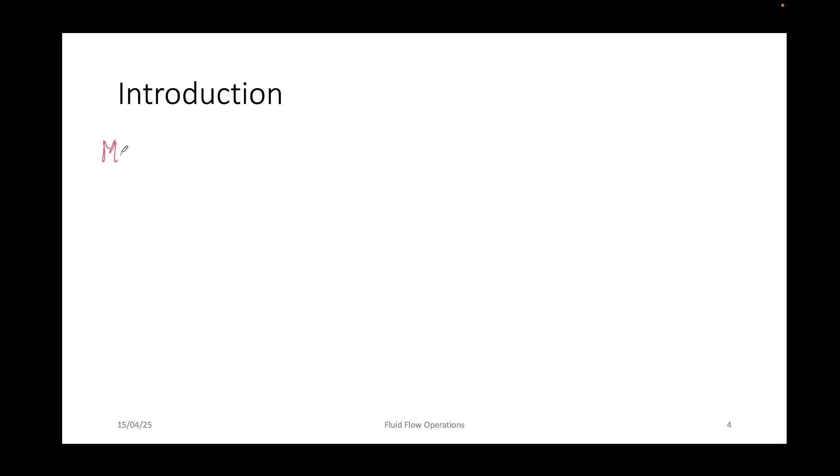What do you understand by the term multi-phase flow? Anyone? You can type it in the chat box or you can unmute yourself and answer me.

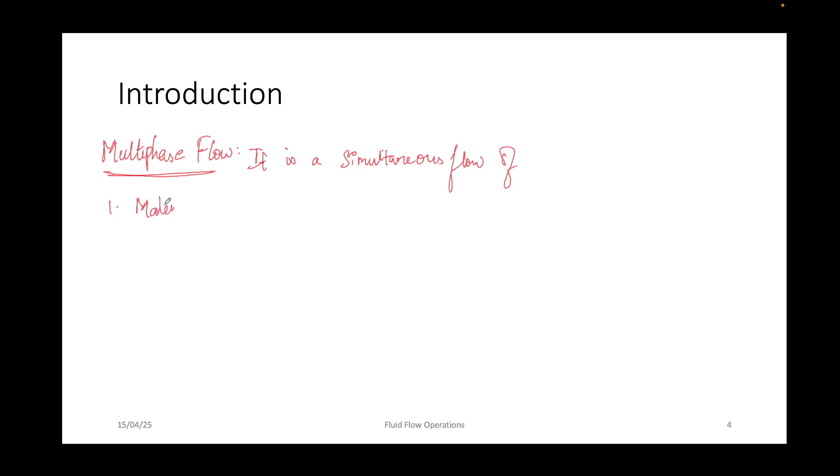So it's nothing but having two different phases in the same flow, right? Be it liquid phase, gas phase, solid phase, something like that. If you go to the proper definition, multi-phase flow is a simultaneous flow of materials with different states or phases. Let me just write it down. It is a simultaneous flow of materials with

different states or phases. So it could be either a gas phase, liquid phase, or a solid phase. Basically, they should be in different phases. It could also be a simultaneous flow of materials with different chemical properties, but in the same state or phase.

Materials with different chemical properties, but in the same state or phase. So multiphase can be a combination of a liquid phase and a gas phase.

So we have three phases, right? Solid, liquid, and gas. It could be solid-liquid, liquid-gas, or solid-gas, right? But a multiphase flow can be formed with the same phase as well. Let's take a liquid-liquid phase.

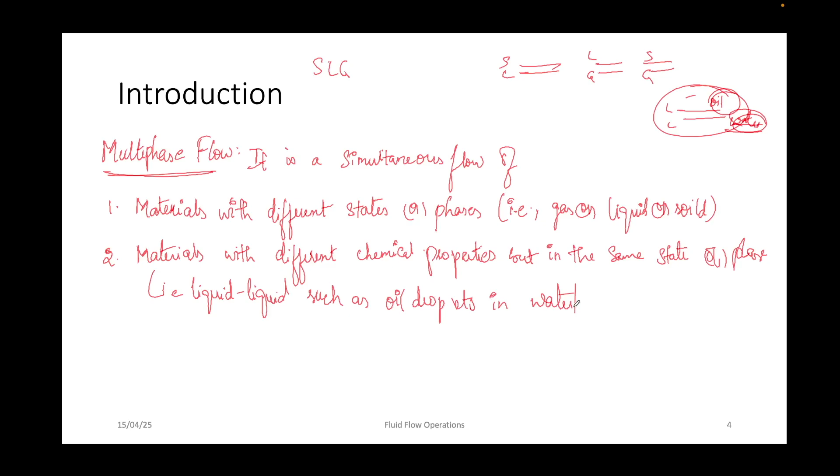Liquid-liquid, such as oil droplets in water. This is the best example of multi-phase flow. When you're talking about multi-phase flow, there are a few terms you need to understand. The first one is continuous phase and discrete phase.

Continuous and discrete phases. Okay, so what is a continuous phase and what is a discrete phase? So if that particular liquid, gas, or solid is flowing continuously, it is nothing but a continuous phase.

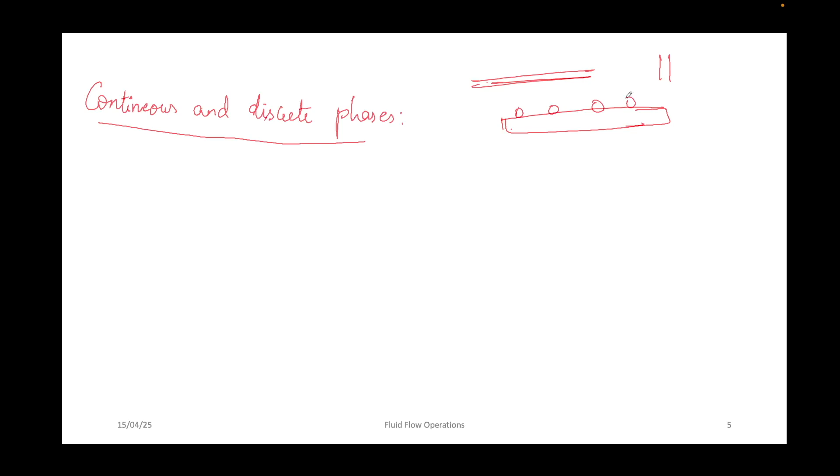And if there are any partitions, like sections, let's say this is a liquid phase and oil droplets are dispersed in a liquid phase, or liquid flow, then this could be a discrete phase, right? So there'll be sections between two different points. So one phase will be a continuous phase, while the other phase will be dispersed within the continuous phase. So this could be one arrangement of multi-phase flow.

One of the phases is continuous, while the others are dispersed within the continuous phase. Okay.

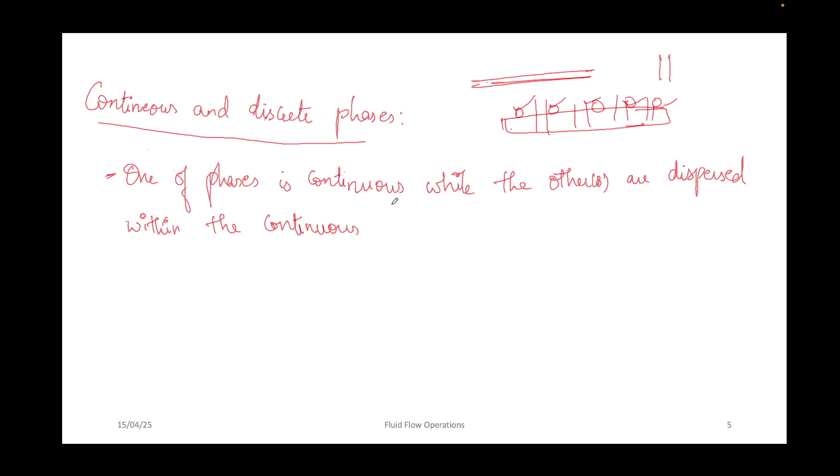So we could be having n number of phases, right? Let's say we can have a three-phase system. Multi-phase means you are having more than one phase. So you can have two phases flowing simultaneously, or you could also have three phases flowing simultaneously. So that is why I wrote others instead of other.

So what could be an example? Gas bubbles in liquid could be an example. Liquid droplets in a continuous gas phase could be an example, or liquid droplets in another liquid, like oil dispersed in water, or solid in liquid or gas phase. That could be an example.

Gas bubbles in liquid phase is an example of a dispersed phase in a continuous phase. So here gas bubbles will be the dispersed phase and liquid will be the continuous phase. And then we have liquid drops in continuous gas phase. And then we have liquid drops in another liquid. And then we have solid in liquid or gas phase.

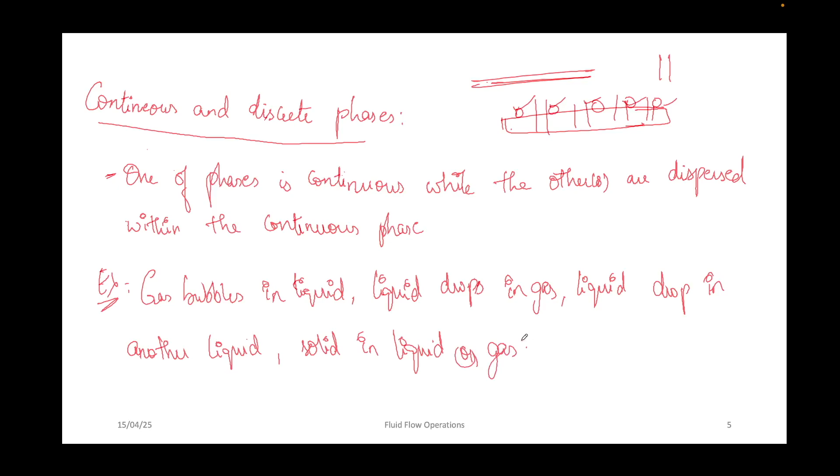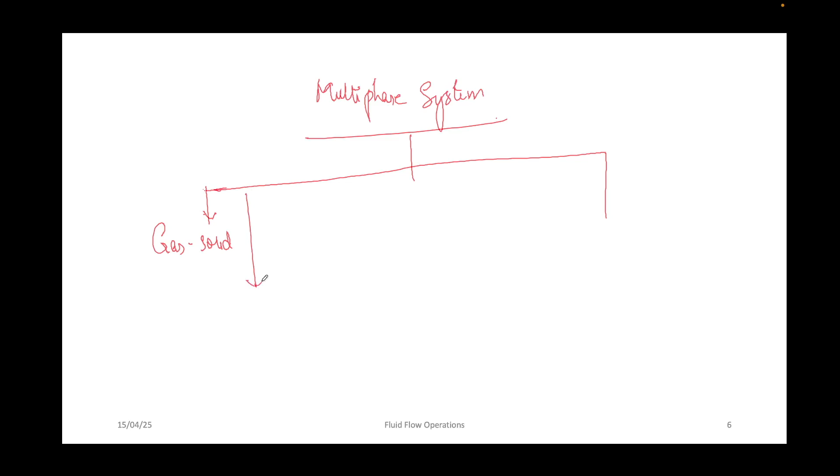So multi-phase flow could be made out of two systems or three systems as well. First one is gas-solid. Then we have gas-liquid. Then we have liquid-solid. On the other hand, we have three-phase flow, that is gas, liquid, and solid. So these are examples of two-phase flows, whereas these are examples of three-phase flows.

So here gas or liquid acts as a continuous phase, and the discrete phase can be a gas or a liquid, which is acting as a discrete or dispersed phase. So first, let's see the gas-solid system.

So can someone give me an example of a gas-solid system? Any example, it could be right or wrong. Examples of gas-solid phase.

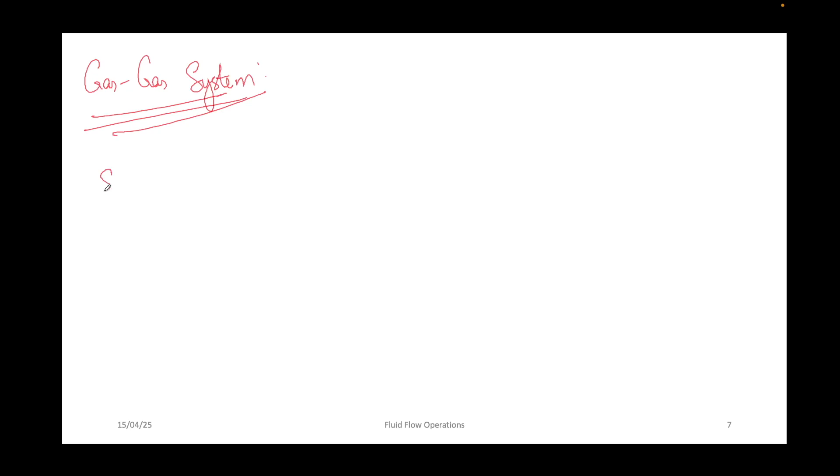So gases can be used as both a primary and a secondary fluid. Let's take an example. How many of you know sulfur hexafluoride, SF6? SF6 is six times heavier than air.

So this SF6 can be mixed with argon and it can be used for insulating windows. Used in insulated windows. This is an example of a gas-gas mixture or gas-gas system.

And then we have use of SF6 in the metal industry. When casting magnesium, SF6 is used. I'll not be going into the details. I'm just giving you an idea of different applications for gas-gas systems. Used in metal industry for casting magnesium.

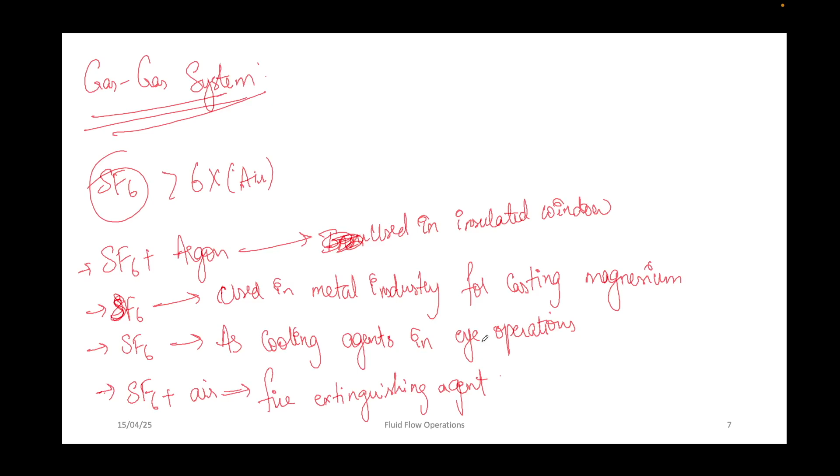Then we have gas-liquid flow systems. Can any one of you give me examples of different gas-liquid flow systems or applications? Where do you use gas flow systems?

So, talking from an industrial point of view, when gas is a dispersed phase and liquid is a continuous phase, these types of flows are very important in industrial applications. You'll understand why in a bit. So if you look at the uses of gas-liquid flow systems,

coming to the first example, that is absorption of gases in liquids to remove it from a gaseous mixture. Absorption of gas in liquid to remove it from a gaseous mixture.

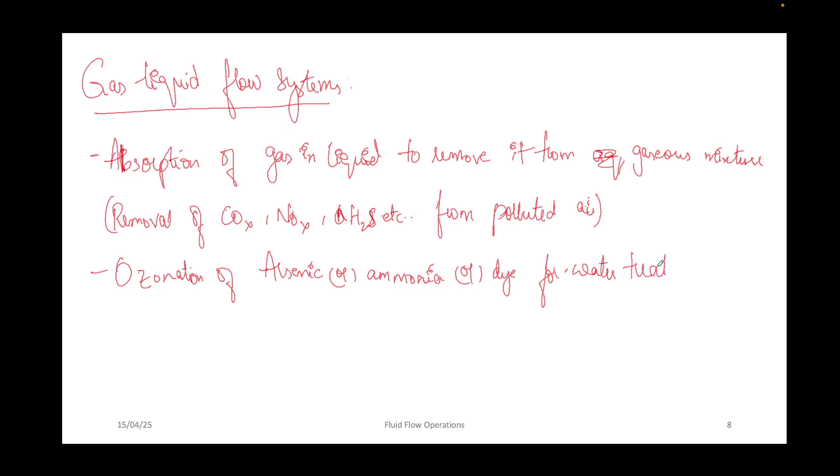This can be done for other gases as well; you just have to change the solvent. So you'll be able to remove the unnecessary gas from the gas stream. Other examples of gas-liquid systems are ozonation of arsenic, ammonia, or dye for water treatment. This is also basically removal of these substances.

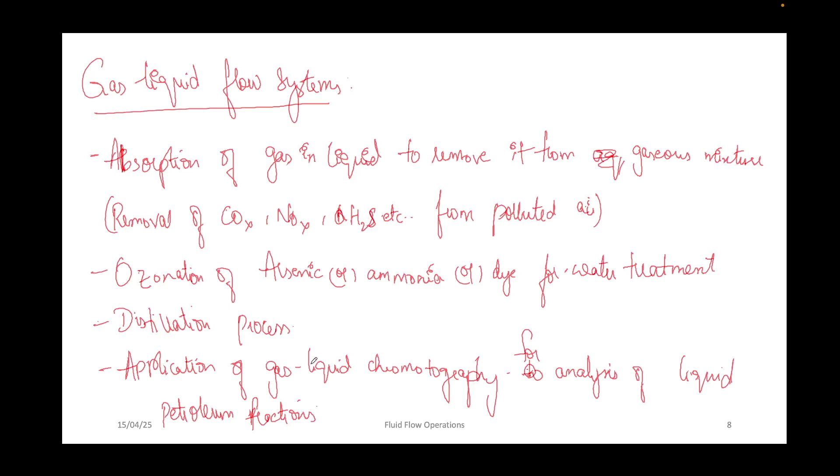Then we have the distillation process, which is also an example of a gas-liquid system. And then we have gas-liquid chromatography, which works on the same principle, for analysis of liquid petroleum fractions. So this is one more application of gas-liquid systems.

Then we have gas-liquid reactions, which occur in industries whenever we are producing chemicals using synthetic methods. Industrial gases like O2, H2, carbon monoxide, and carbon dioxide are widely used for synthetic processes in the chemical industry, so there also we'll come across gas-liquid flows or gas-liquid systems.

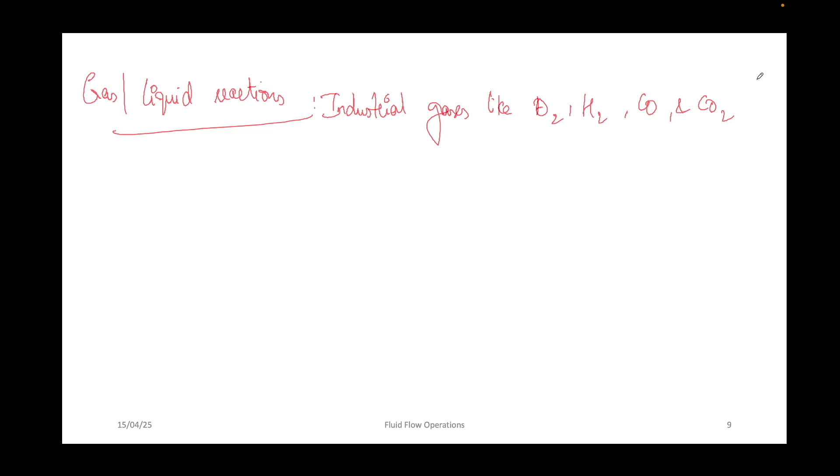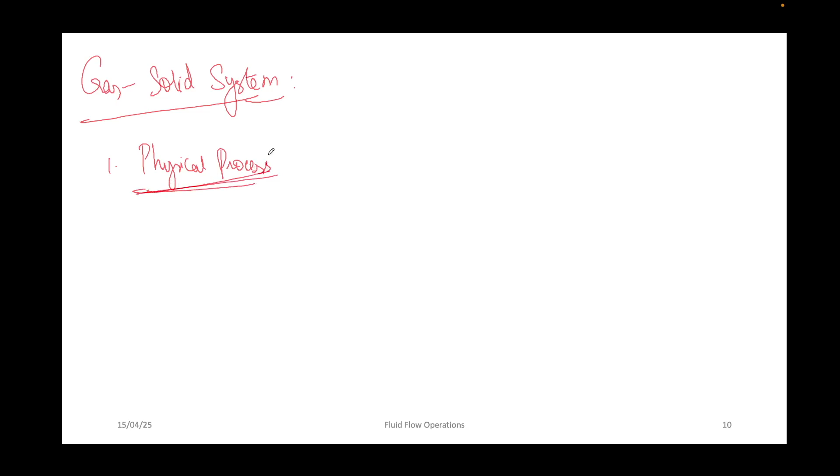Then we have the gas-solid system. In most applications, the solid will be suspended in the gas stream. Coming to applications, one is physical processes, in other words, no reactions happening in the system. So what are the examples of physical processes for gas-solid systems?

Drying of particles and coating of a surface are examples of gas-solid systems. Then we have granulation, which is growing particles, and heat treatments like annealing and quenching. Filtration is also a gas-solid operation. Then we have blending and classification. These are all examples where there is no reaction, a purely physical process.

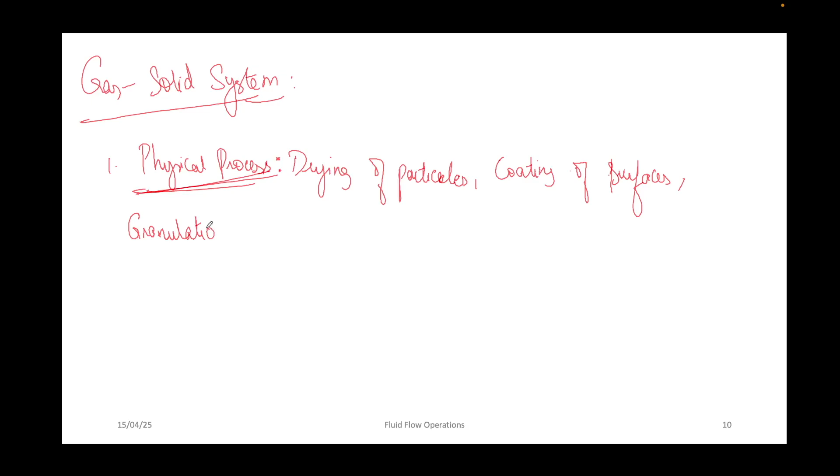Drying of particles, coating of surfaces, granulation, heat treatment, filtration, blending, and classification.

On the other hand, we have chemical reactions: gas-solid reactions. It could be roasting of ores, which is heating them to higher temperatures in the presence of oxygen, like roasting of ZnS, Cu2S, and nickel sulfides. These are all examples of gas-solid systems.

Then we have combustion and incineration, gasification, coking, pyrolysis, calcination, and carbonization; all these are gas-solid reactions. We also have catalytic regeneration and fluorination of uranium particles. Any chemical reaction supported by a catalyst in a gaseous system can be added, like fluid coking and reduction of iron oxide; these come under gas-solid reactions.

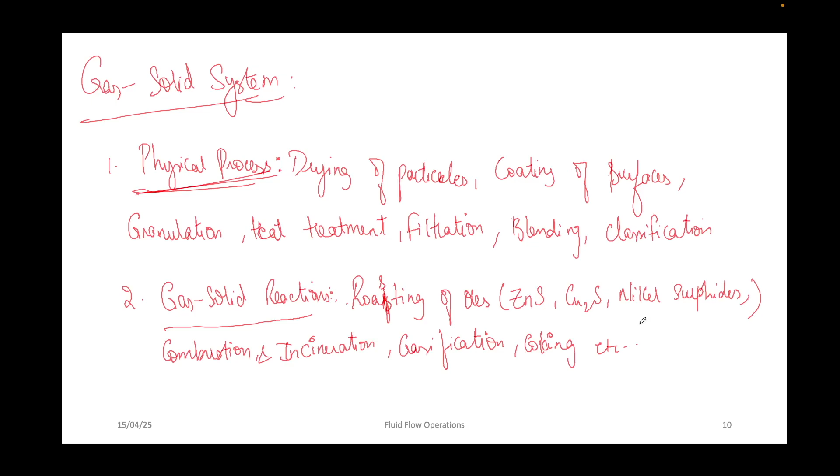So what would be the next system? We are done with the gas phase in combination with liquid and solid. What will be the next case? That would be liquid-liquid or liquid-solid. First let's see the liquid-liquid system.

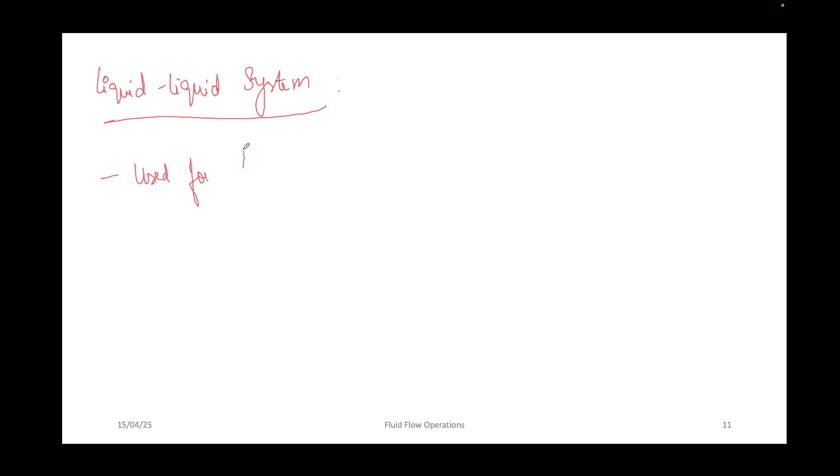Liquids are used both as the discrete and the continuous phase. Applications would be emulsification of oil, flow of emulsions of oil and water in pipelines, and different types of contactors like packed columns, pulsated columns, and stirred reactors in various applications. And also extraction of organic contaminants from wastewater.

Okay. And as I've told you, there are many different types of contactors like packed columns, pulsated columns, stirred tanks. So all the reactions are happening in these columns. They'll again fall in the same category as liquid-liquid systems. Okay. And then finally, we have liquid-solid systems. This is the last classification in a two-phase system.

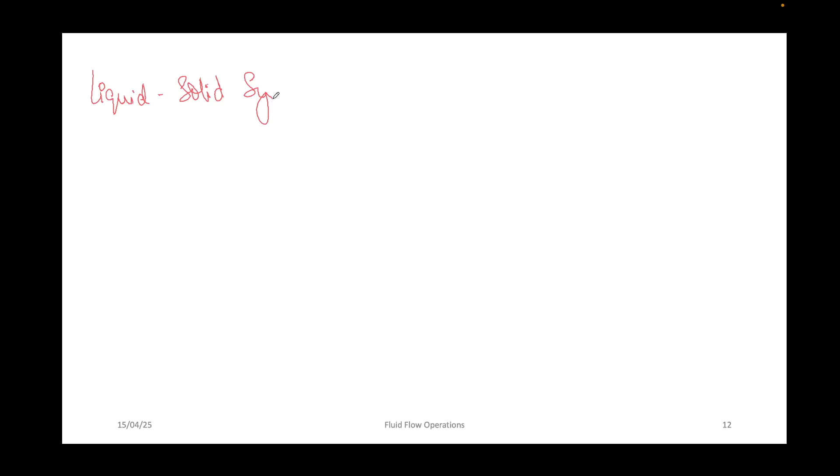Okay. Then we have two-phase systems again. Okay. So again, here liquid is going to be a continuous phase and solid is going to be a discrete phase. So what could be the examples of this type of system? Sorry. What could be examples of a liquid-solid system? Any one example?

Okay. So we know conveyors, right, where they'll be transporting solid matter from one location to another location. There's also something called hydraulic conveying, where they'll be using a liquid for transporting. First, they'll be dispersing solid in the liquid phase, and then they'll be transporting the solids from one place to another place with the help of the liquids. Hydraulic conveying of solid materials.

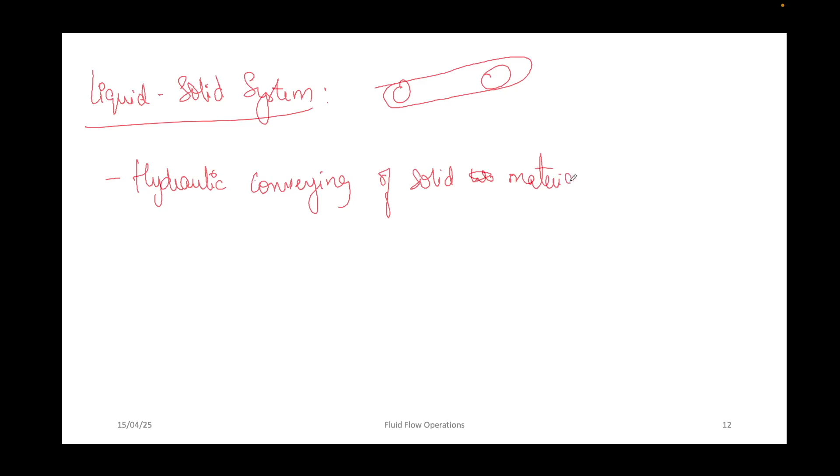Then we have slurry flow applications, which basically include transportation of coals, ores, and also flow of mud. These are all examples of liquid-solid systems, okay. And then we also have the crystallization process. In crystallization, solids will be suspended in the liquid phase, right? Crystallization of solids.

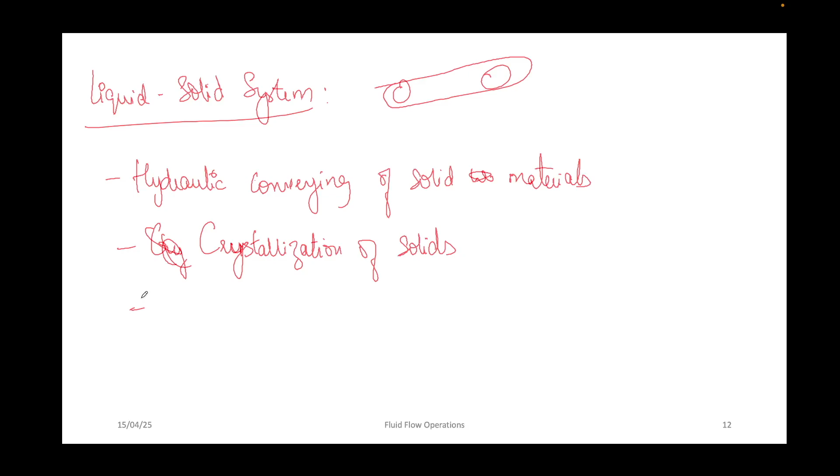And then we have flow of liquids through solids, which is also an example of a liquid-solid system. And this is porous media flow. Okay. So we are done with two-phase systems. Now let's also study multi-phase flow, three-phase systems. Okay. First one is the gas-liquid-solid system. Basically, gas-liquid reactions happen in the presence of a solid catalyst. Okay.

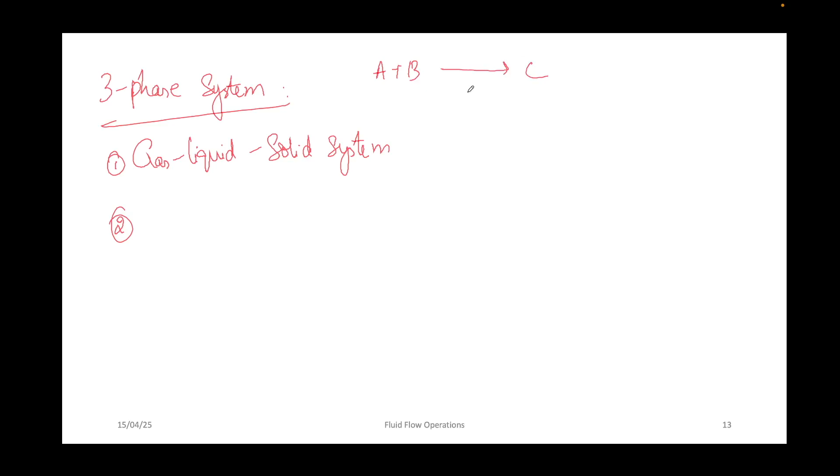Then let's say A and B are reacting to give some product C, okay? And then we have a solid catalyst. A could be in a gaseous phase and B could be in a liquid phase. So this is an example of a gas-liquid-solid system, and then we have the gas-liquid-liquid system. This is also an example of three-phase systems.

Examples could be oil, water, and natural gas, which is found basically in the condensation or evaporation of immiscible liquid mixtures. Flow of oil, water, and natural gas. So here, water and oil are in liquid phase, and natural gas is in gas phase. Okay.

Then we have solid-liquid-liquid systems. So in a pipeline, if sand is mixed with oil and water, then this flow comes under solid-liquid-liquid systems. Okay. So these are three different three-phase systems, and then we finally have a four-phase system as well.

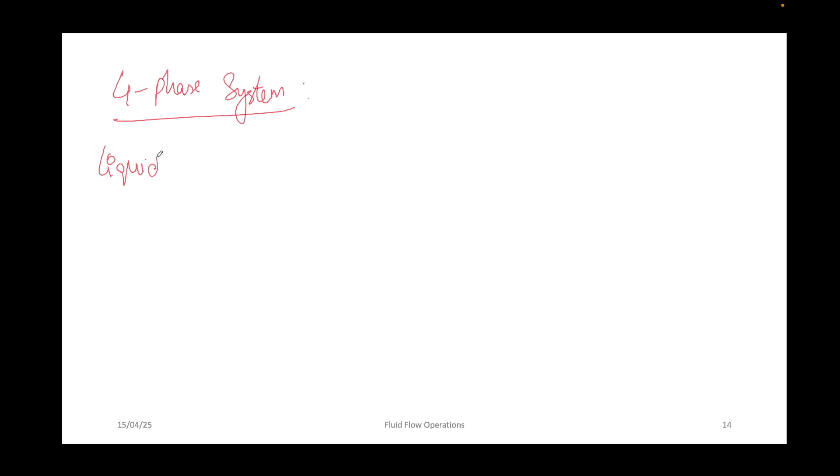So this is a liquid-liquid-gas-solid system. Okay. In a freeze desalination process, butane liquid is added into saline water, which results in the formation of ice. So in this case, the system is a mixture of butane liquid, water, ice, and butane vapor. So liquid is water and butane liquid, gas is butane vapor, and solid is ice. Okay. So this is the freeze desalination process.

So why do we need to learn multi-phase flow? This will be helpful in proper design of efficient multi-phase units. As I've told you, most industrial operations are based on multi-phase flow. So understanding multi-phase flow will help you in better designing of the process, which results in efficiency and economic advantage for the industry and also for the company as well.

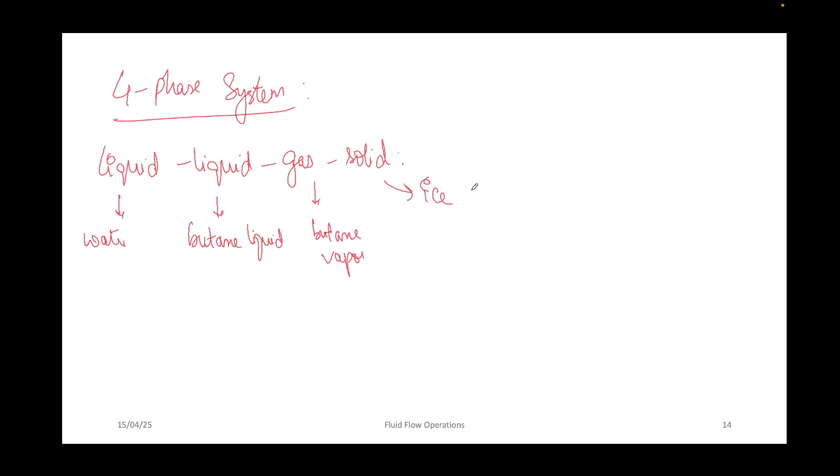Distribution mechanism of each phase, and this will help you in understanding scale-up issues like increasing the bed diameter, particle size, what happens when you change the mechanical arrangements of heat exchangers, and also when you change the L by D ratio. So this helps you in addressing all these problems. Then you can also better understand heat transfer and mass transfer characteristics, and you'll be able to simulate the system better.

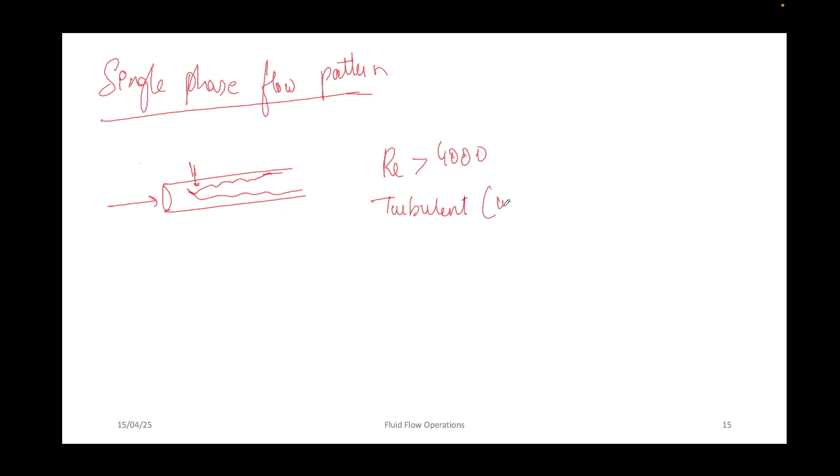So let's just recall a single phase flow. Whenever it is flowing in a pipe, when Re is greater than 4000, that is a turbulent flow, right? So whenever the flow is highly turbulent and you're injecting a dye into this stream, you can clearly see that there is rapid mixing happening in the stream. So this is unpredictable, and also rapid mixing happens, right?

Then we have a situation where Re is in between 2300 and 4000. This is a transitional flow, and same thing: if you inject a dye into this particular system, you can see there is turbulent outburst in the flow.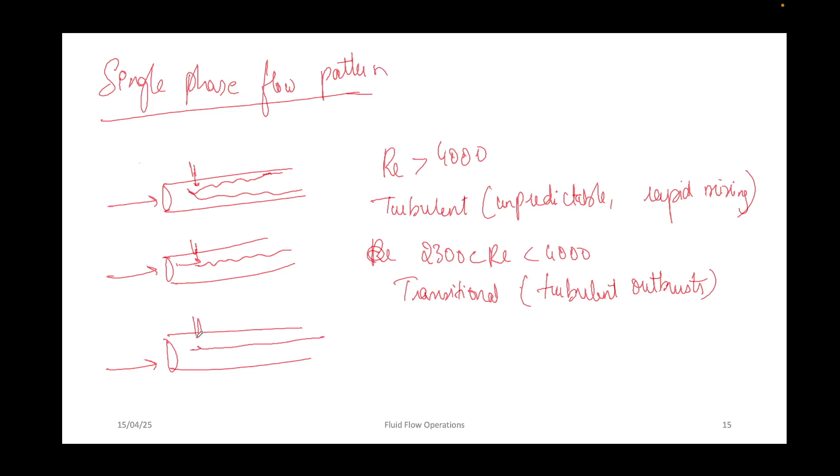And then you have finally the laminar case when Re is less than 2300. Okay, this is a predictable and slow mixing flow, right? So basically, when you're increasing the velocity, sorry. So this is about single phase flow.

Okay, but what would be the flow regime or flow pattern for a multi-phase flow? Let's take an example of gas liquid flow. When a gas and a liquid are forced to flow together inside a pipe, there are at least seven different geometrical configurations at different stages of operation. So these multi-phase flow behaviors can be affected by different parameters.

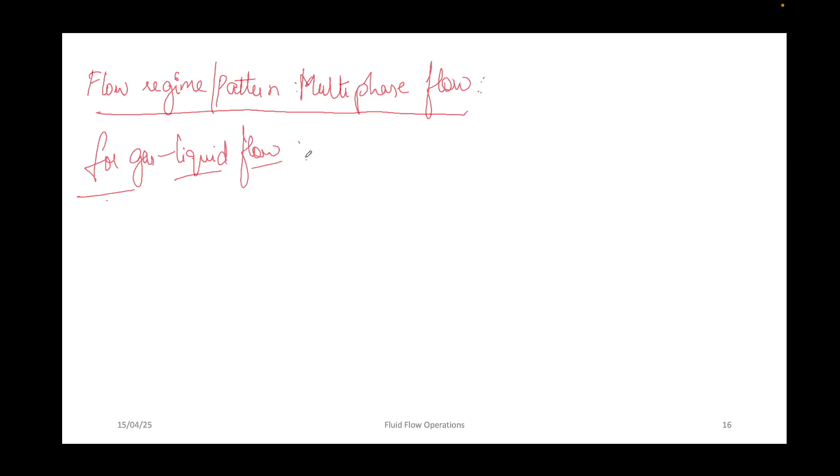They are affected by interfacial tension forces. I'll just write down these parameters. Interfacial tension forces, wetting characteristics of the liquid on the channel wall,

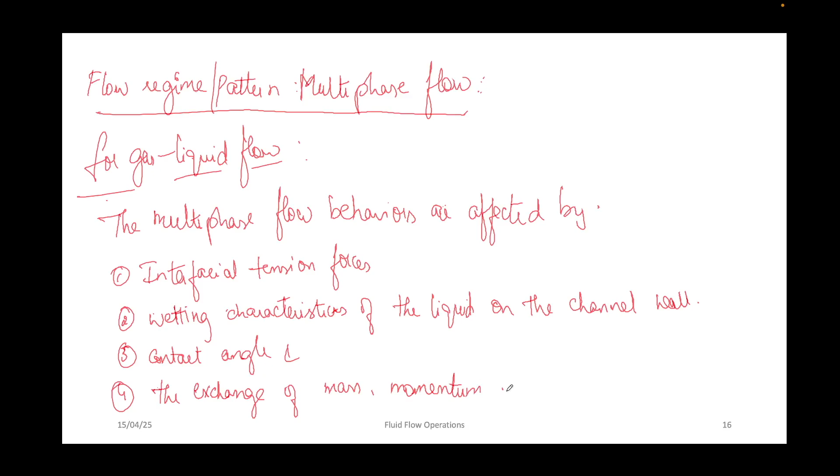contact angle, and finally exchange of mass, momentum, and energy between the different phases. Okay, so these are the different parameters which are going to affect a multi-phase flow.

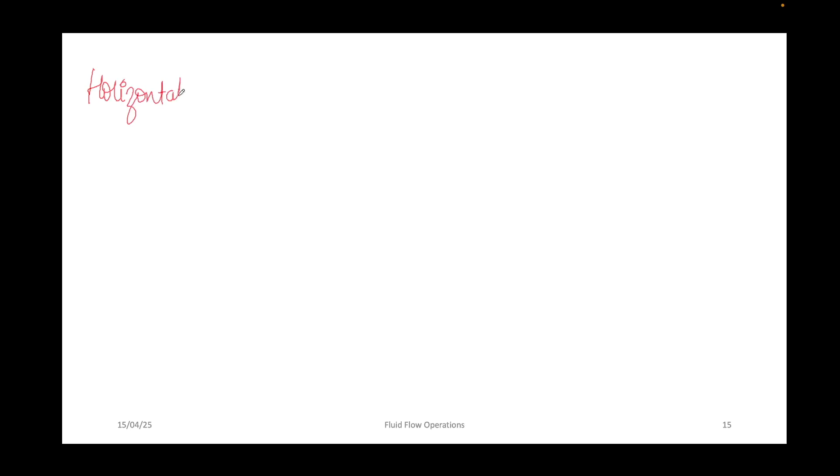So let's first start with horizontal cocurrent gas liquid flow patterns. Horizontal cocurrent gas liquid flow patterns. First we have stratified flow.

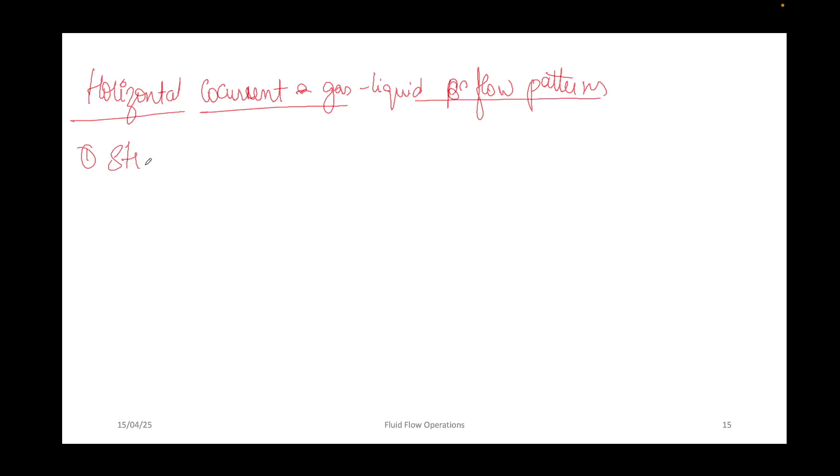Stratified flow is usually observed at relatively low flow rates of gas and liquid when gravitational separation is complete. The liquid has a tendency to occupy the lower part of the tube because of density, whereas gas occupies the top part of the tube, separated by an undisturbed horizontal interface.

So this looks something like this. Let's say we have a pipe and gas and liquid are flowing in it; you can clearly see a line which is separating. This is going to be the liquid phase and this is going to be the gaseous phase. Okay. And then we have stratified wavy flow.

As the gas velocity increases, waves will start to form at the gas liquid interface, which results in a wavy or stratified wavy pattern. So if you increase the speed of the gas flow, you'll observe these waves being formed inside the gas liquid system. And the amplitude of waves depends on the relative velocity of the two phases. Okay, this is the second, stratified wavy flow.

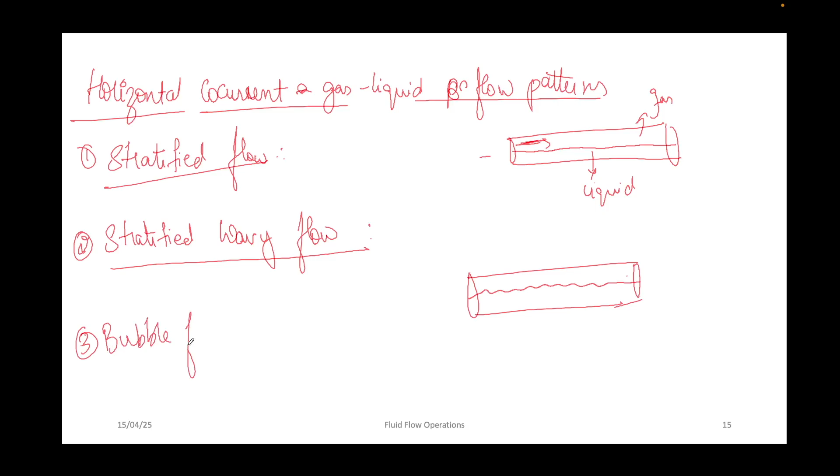And then we have bubble flow. In this particular system, the phase is composed of bubbles dispersed in a liquid stream, and the bubbles tend to accumulate in the upper part of the tube because of buoyancy forces. The uniform distribution of bubbles occurs when shear forces dominate on the bubble surface, and the pattern typically occurs at high mass flow rates.

Okay, so liquid will be the continuous phase and bubbles will be dispersed in it. This occurs at higher flow rates, and these bubbles will be seen in the upper side of the pipe because of the buoyancy forces. And then we have annular dispersed flow.

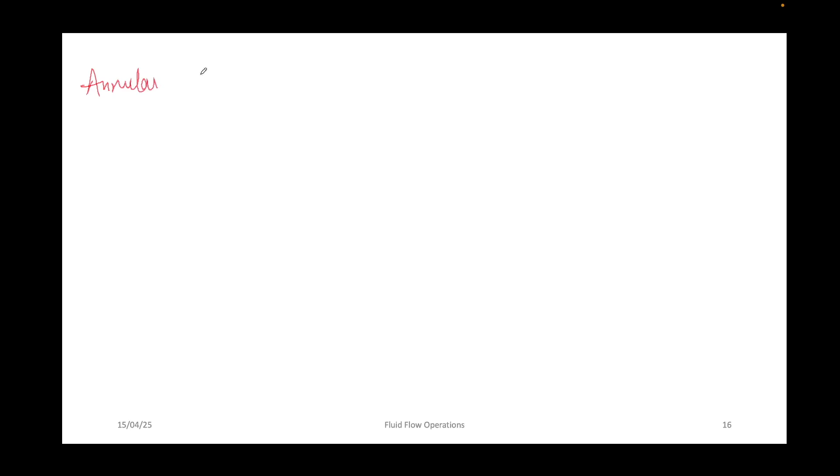When you further increase the gas flow rate alone, without changing the flow rate of liquid, the liquid forms a continuous annular film around the perimeter of the tube. The pattern is similar to that in vertical flow, except that the liquid film tends to be much thicker at the bottom than the top because of the gravitational force. And a portion of the liquid may be retained as fine droplets within the gas core.

Okay, so liquid will be at the edges. This will be the liquid phase, and here you can see the gas that is flowing. So basically liquid will be forming an annular flow and gas will be flowing in this middle section. Okay, then we have plug flow.

In this flow pattern, liquid plugs are separated by elongated gas bubbles, which tend to flow along the top side of the tube due to the buoyancy forces. As the gas flow rate is increased, bubbles interact and coalesce to give rise to larger bullet-shaped bubbles. So plug flow is sometimes referred to as elongated bubbly flow as well.

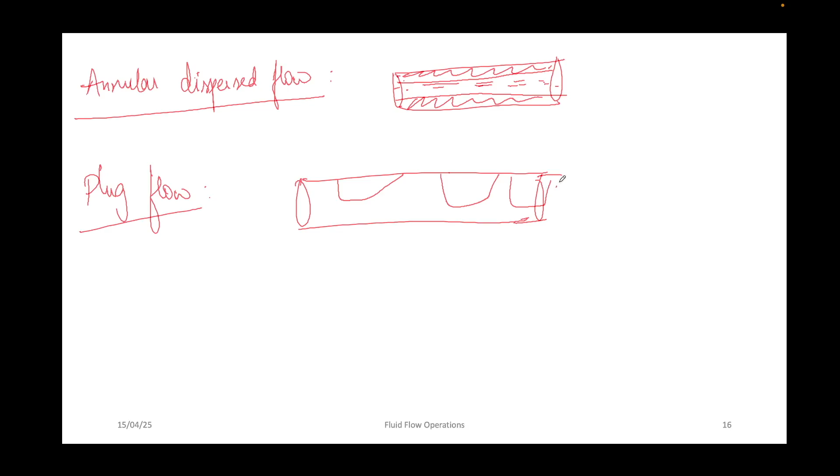So basically, liquid will be separated by gas bubbles, something like this. You can see plugs which are being formed. Okay, and then we have slug flow.

In this case, a frothy liquid slug is formed at the higher gas velocities, and the crests of the waves touch the top of the tube, and the frothy slugs of the liquid phase carry entrained bubbles in them. The slug completely fills the cross section of the tube, and the main difference between a slug flow and a plug flow is the more pronounced nature of the intermittent liquid mass separated by larger gas bubbles.

And these slugs can often be very big and may cause some serious difficulties in the operation of horizontal pipes. So let me just show you how this looks. It's almost similar to the plug flow, but the intermittent liquid mass will be separated by larger gas bubbles.

Okay, so this is how it looks. This will be the liquid phase, and here you can also see some gas bubbles which are entrained, and this is the gas phase. Okay. Sorry. And then we have mist phase or mist flow.

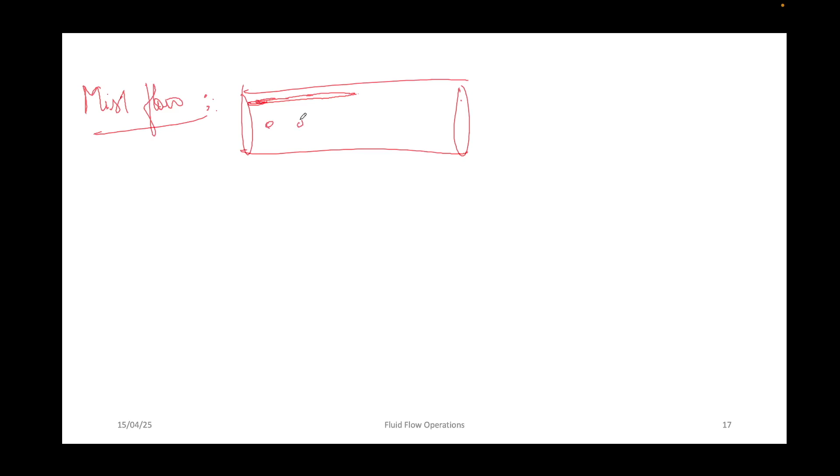So if you just take the example of annular flow which we discussed and increase the flow rate of gas inside it, if you go to very high mass fluxes, then the liquid which is present at the edge of this pipe will become unstable and the liquid will be entrained as droplets in the core gas. So here fine liquid droplets will be dispersed in the gas stream. Okay, so this is how mist flow looks like.

So these are different types of flows in co-current gas-liquid streams in a horizontal pipe. Then we also have the case of vertical flow or vertical pipeline flows. So how does this vary in a vertical flow? Obviously, gravitational force will also start acting when you're dealing with a vertical pipeline, right? So you need to take that into account, and also the flow behavior will be changing a little bit.

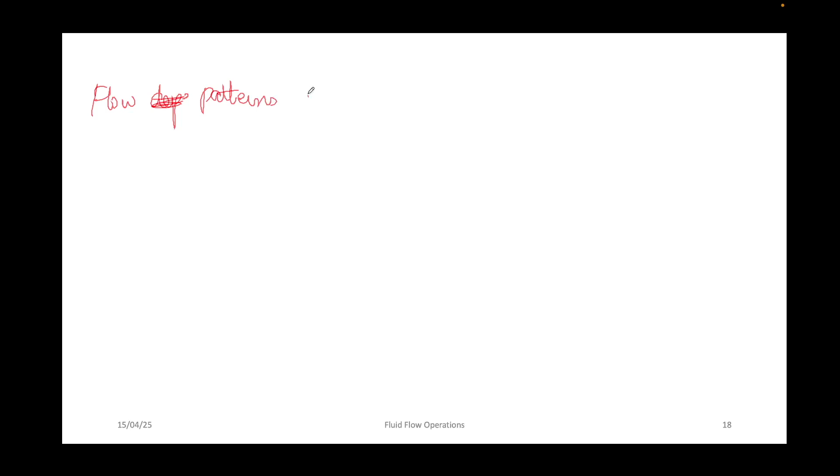So I'll not be going into that part, okay? It was already discussed in the class. I'll try to take the next chapter. So which factors does the flow pattern depend on, okay? Which parameters are going to affect the flow pattern, or which parameter is responsible for the flow pattern.

The flow pattern of a multiphase flow depends upon several factors like dynamic variables. It also depends upon geometric variables. It depends on thermodynamic variables and also physical properties of the phases as well. So let's try to look at each parameter. So first is dynamic variables. What are the dynamic variables that are affecting the flow pattern? We have flow rate of the phases, phase fractions. So these are the dynamic parameters.

Then we have geometric variables. Okay, like diameter, length, shape or inclination of conduit, particle size, hole size of a phase distributor. Okay, walls, T-junctions. These are all different geometric variables which are going to affect the flow pattern. So diameter, length, shape, etc. Okay.

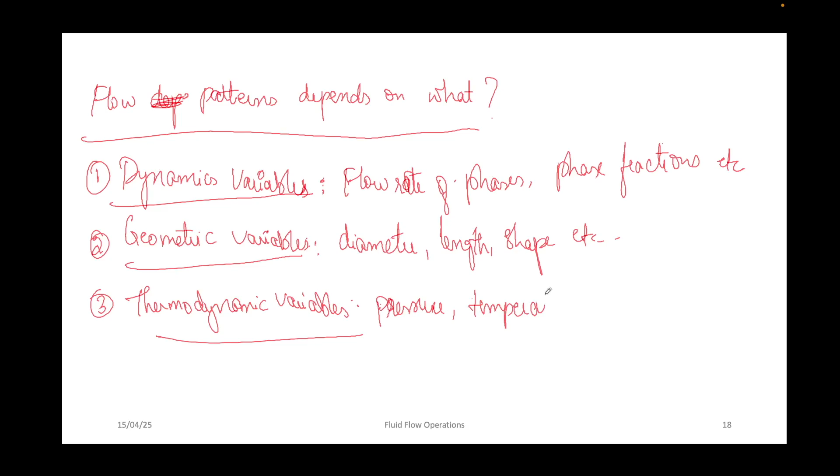And then we have physical properties of the fluid and the phases, like density, surface tension, viscosity, etc. So these are different parameters which are going to affect the flow pattern.

Okay, so do you have any doubts until now? Any doubts till this topic? You can post them in the chat box or ask me. Any doubts?

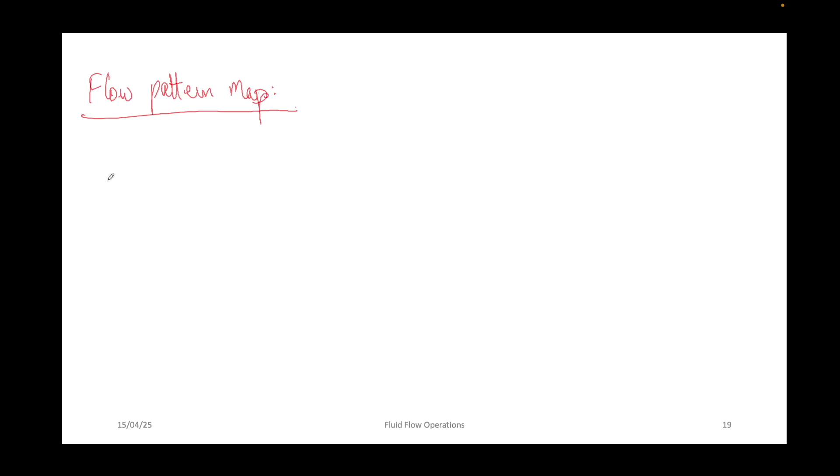If you don't have any doubts, I'll move on to the next topic, that is flow map. So the graphical representation of boundaries or transitions between different flow patterns is called a flow pattern map. We'll also look at an example of a flow pattern map. First, let me write down the definition.

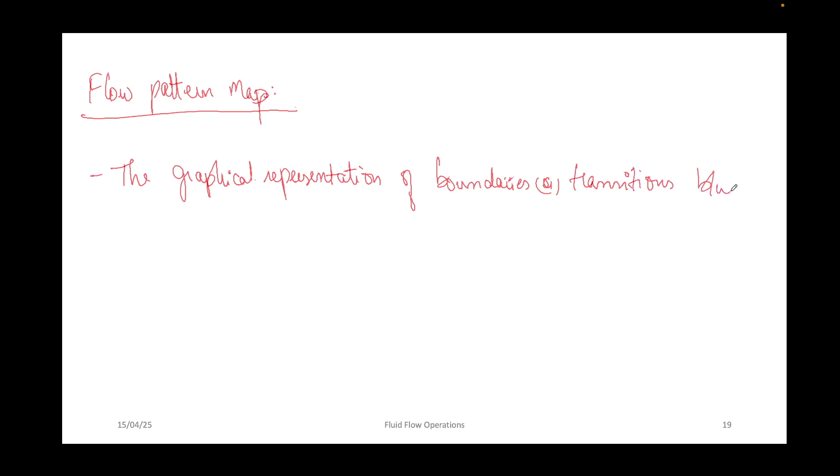The graphical representation of boundaries or transitions between different flow patterns is called flow pattern map.

Okay. A set of parameters or parameter groups are specified to show a direct interrelation on such transitions based on the experimental data. And we'll also look at a flow map in a horizontal pipe as well. Flow pattern map in horizontal pipe.

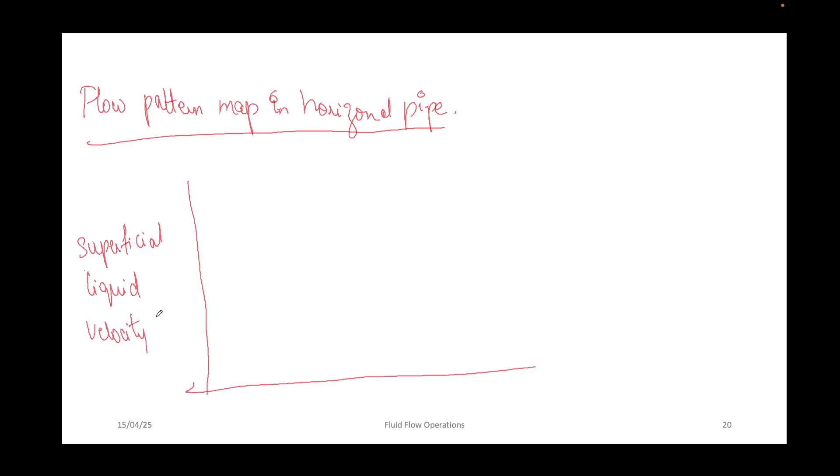There is a graph between superficial liquid velocity, superficial liquid velocity, which is in meters per second, and then you have on x-axis superficial gas velocity. This is again meter per second. So I can write down the units as well. This one is 10, 100, 0.1.

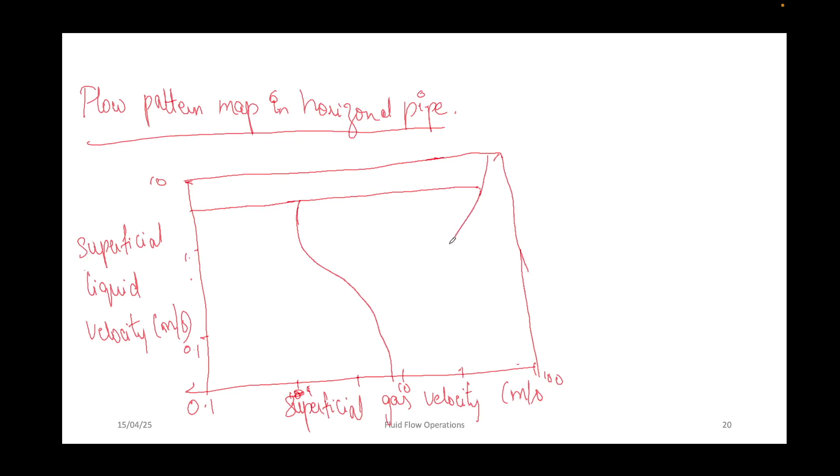This is wave flow, annular or annular mist flow. Then we have dispersed flow. This is slug flow. Bubble or elongated flow. This is stratified flow.

Okay. So when you increase superficial gas velocity, let's say initially gas is flowing at 1 meter per second, and liquid velocity is below 0.1 meter per second, we'll be initially having a stratified flow. But if you increase superficial gas velocity from 1 to 10, keeping flow rate of liquid constant, then we'll be moving from stratified flow to wavy flow,

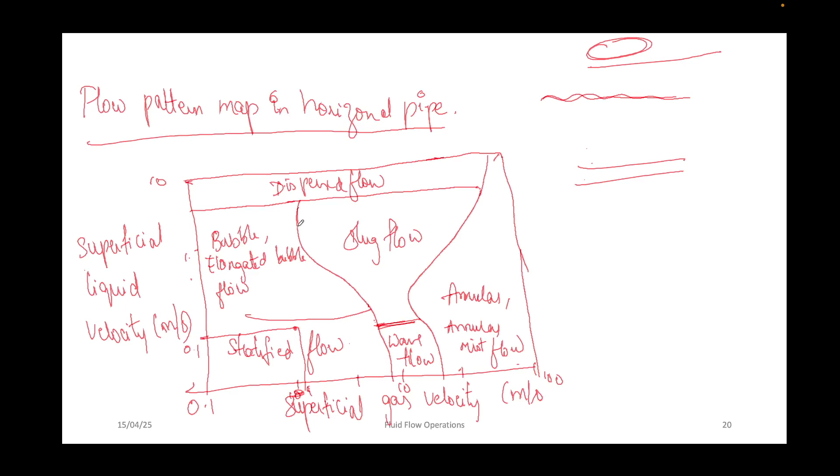So you can do it for vertical pipe as well. This is for horizontal pipe. You can do the same thing for vertical pipe as well. Okay. So now let's look at volume fractions or hold up of phases.

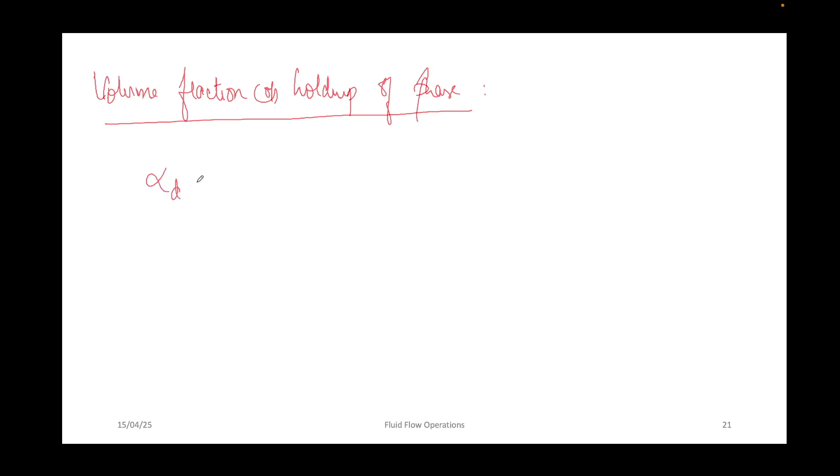Volume fraction or hold up of phase. So the volume fraction of a dispersed phase can be defined as alpha D, which is nothing but VD by V total. This can also be written as AD by A. So VD is the volume of dispersed phase and VT is the total volume.

And the volume fraction of continuous phase can be written as VC by VT, which is continuous phase volume upon total volume. This can also be written as AC by A. Where VD is again the dispersed phase volume and VC is the volume of continuous phase, and total volume is VD plus VC. VT is equal to VC plus VD.

So the reason for writing AD instead of VD: let's take alpha D, the volume fraction of dispersed phase. Alpha D is VD by VT. Volume can also be written as area into length, and for total volume we can write total area into length. Here length is constant, it is not going to change, so this finally becomes AD by A. Similarly, you can write AC into L by A into L, so length gets cancelled out and you'll be left with AC by A.

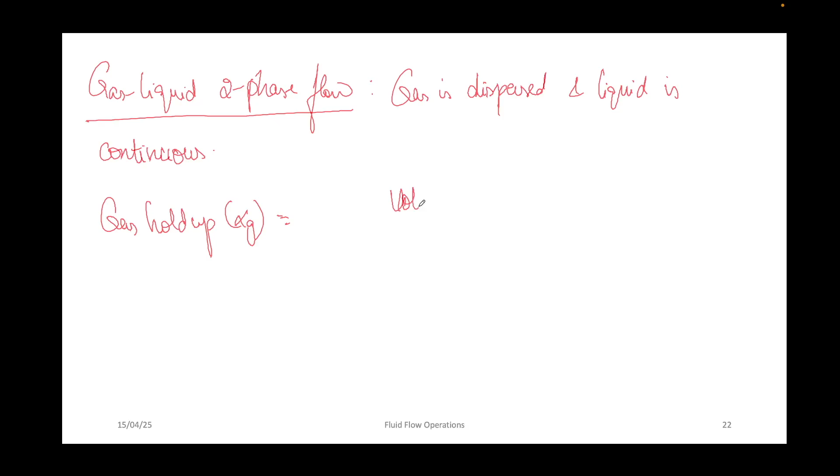So now let's see how to calculate gas hold up and liquid hold up. Let's consider a gas liquid two-phase flow, where gas is dispersed and liquid is continuous. So gas hold up, alpha G, is equal to volume of gas by volume of gas plus volume of liquid, which is equal to Vg by Vg plus VL.

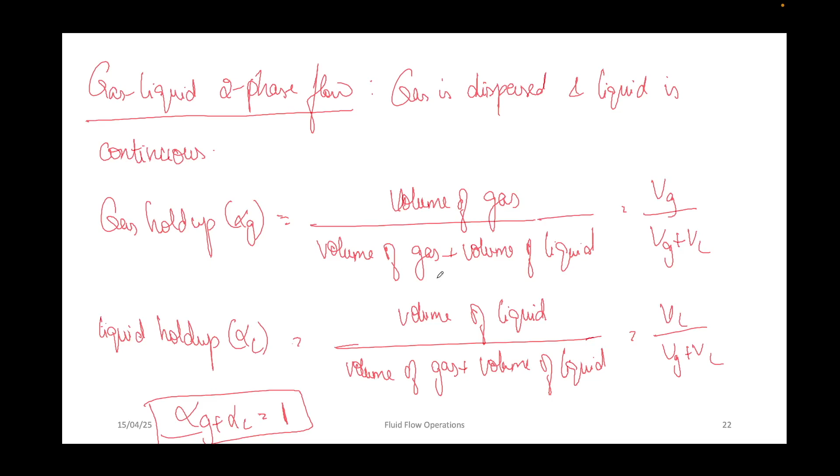And same for liquid phase, liquid hold up alpha L will be volume of liquid by volume of gas plus volume of liquid, so this is VL by Vg plus VL. If you carefully observe, if you add up alpha G and alpha L, it is going to give us 1. These are nothing but volume fractions, so alpha G plus alpha L will be equal to 1.

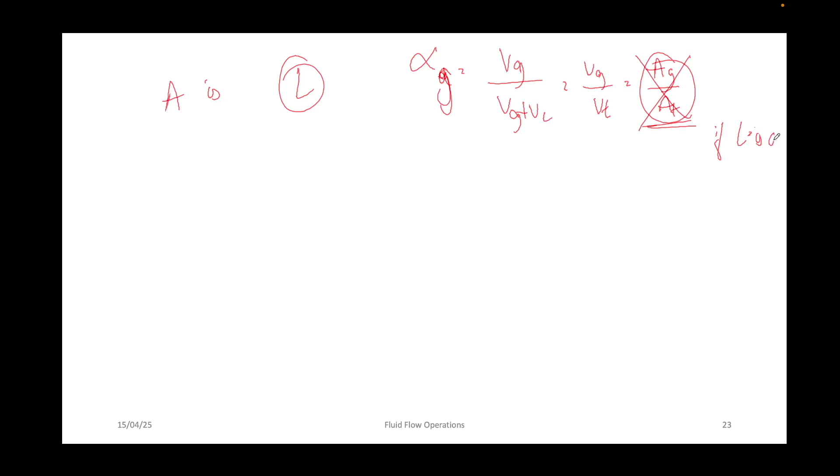I think it would be better if I take an example for this. Or first, let's cover one more topic and then we'll come back to this. Bulk density. So what is bulk density? Bulk density of dispersed phase is the mass of dispersed phase per unit volume of mixture.

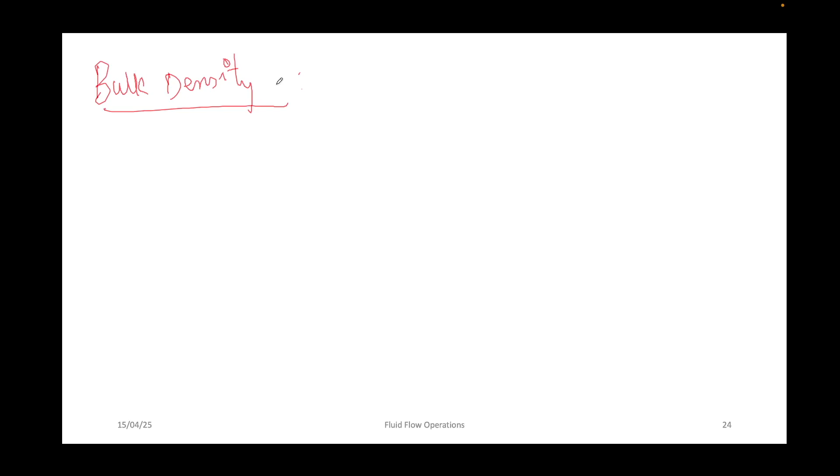Rho d bar, the bulk density of dispersed phase, will be equal to mass of dispersed phase upon total volume Vt. And then we have material density as well, rho d. Rho d bar can be related to rho d by multiplying it with alpha d. This is how you'll be able to calculate particle density using bulk density of the phase.

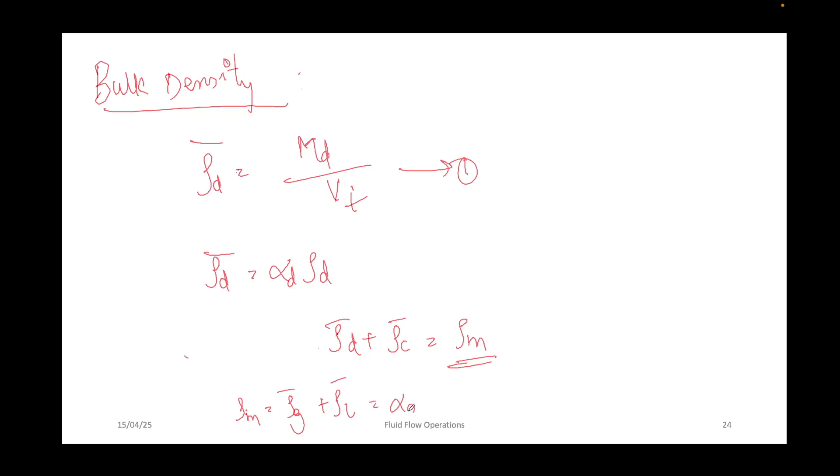The sum of bulk densities for dispersed phase and continuous phase is the mixture density. So rho d bar plus rho c bar, the continuous phase bulk density, will be equal to rho m, the density of mixture. We can also write this as rho m is equal to rho g bar plus rho l bar, which can be written as alpha g into rho g plus 1 minus alpha g into rho L, because for gas liquid systems alpha g plus alpha L is equal to 1, so we can write alpha L as 1 minus alpha g.

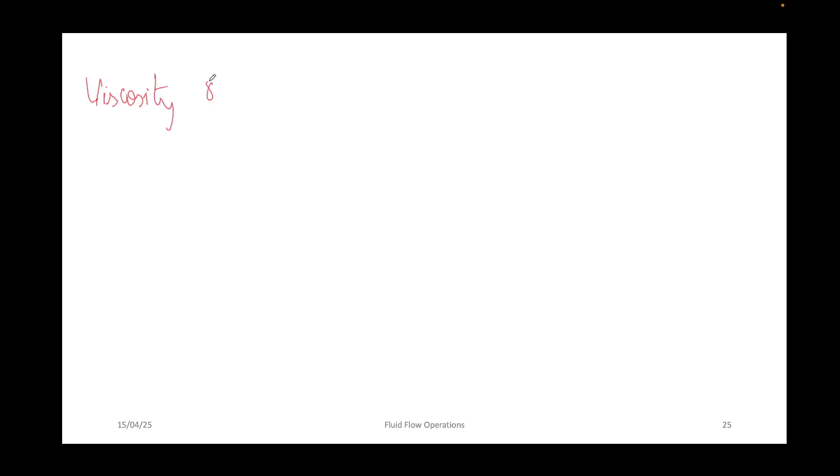Then how do you calculate viscosity of a mixture of multiphase flow? Viscosity of the mixture of multiphase flow: 1 by mu m will be equal to x by mu g plus 1 minus x by mu L. I'll not be going into the derivation part. Mu g is viscosity of gas, and mu L is viscosity of liquid.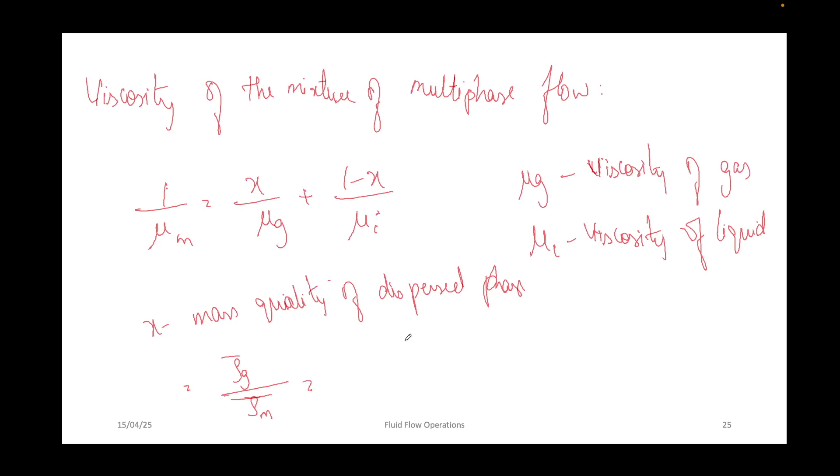Here x is the mass quality of dispersed phase, which is equal to rho g bar by rho m bar. This will be equal to alpha g into rho g by alpha g into rho g plus 1 minus alpha g into rho L.

So do you have any doubts until now? Any doubts till now? If you have any doubts, you can unmute yourself and ask me or post them in the chat box as well. I'll give you maybe 1 or 2 minutes. If you have any doubts, you can ask me, I'll try to answer them. Please post them in the chat box or directly ask them by unmuting yourself.

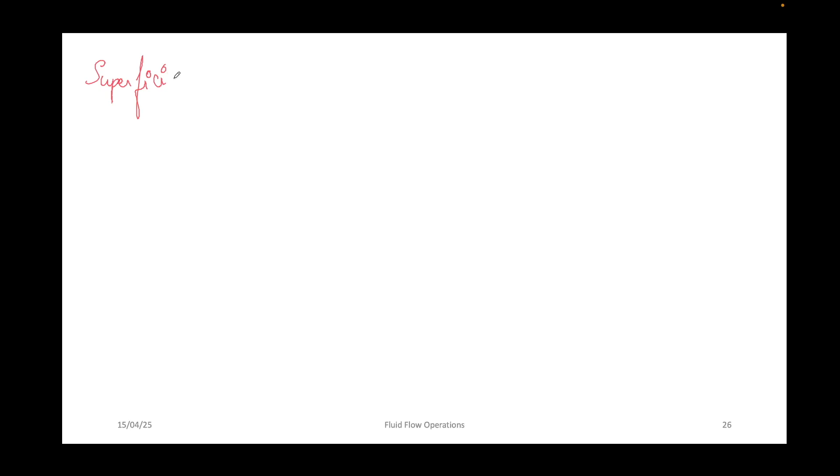Okay. So I'm assuming that you don't have any doubts. So we'll move on to the next topic, that is superficial and interstitial velocities. Superficial and interstitial velocities.

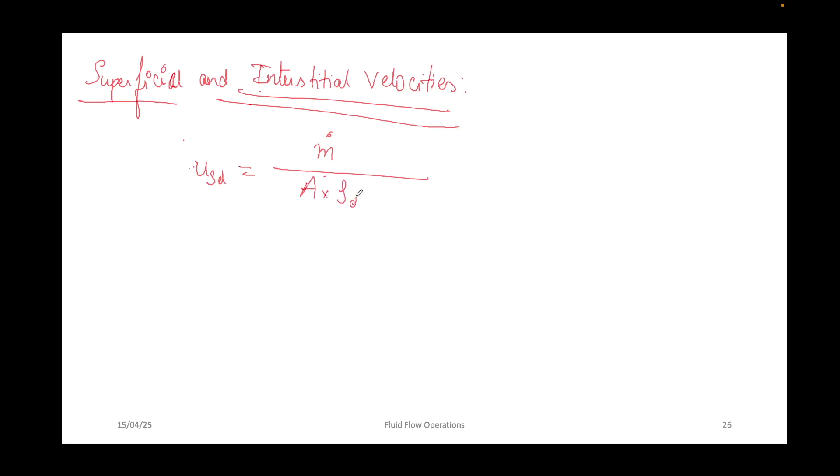For a multi-phase flow in a pipeline, the superficial velocity of each phase is the mass flow rate of that phase divided by the pipe cross-section area, that is A, and a material density. So the superficial velocity can be written as USD, and this will be equal to m dot, that is mass flow rate, divided by area of cross section into density. Okay. So this is the superficial velocity of dispersed phase. That is why D, and S indicates superficial. Okay.

In other words, it is the velocity of a phase if the phase occupied the entire pipe cross section. This is going to be the velocity of that particular phase. And the phase velocity UID is the intrinsic or actual velocity of the phase. If UID is the intrinsic or actual velocity of the phase, then superficial and interstitial velocity are related by volume fractions as USD is equal to alpha D into UID.

Okay, so here UID can also be written as QD by AD, which is equal to USD into A by AD. So here we'll be getting USD by alpha D. So if you just simplify this, you will be getting this equation. Okay, so this is how superficial velocity and interstitial velocity are related. Okay.

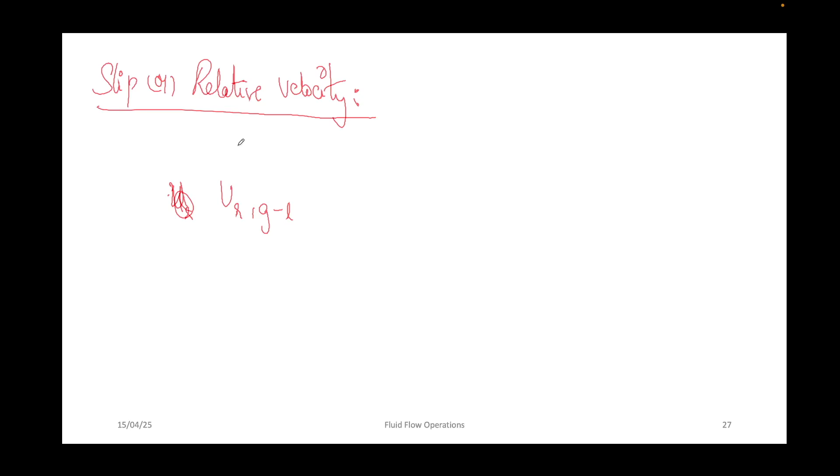Then we have slip or relative velocity. So the relative velocity between two phases, such as gas and liquid phase, in case of a two-phase flow, is denoted by UR,G-L. That is relative velocity between gas phase and liquid phase. So this can be written as UIG plus or minus UIL, which is again equal to USG by alpha G plus or minus USL by 1 minus alpha G. Okay, this is nothing but alpha L. As it is a two-phase flow, we can write alpha L as 1 minus alpha G.

Okay, positive sign indicates it is a counter current flow, and the negative sign indicates that it is a co-current flow. And the relative velocity is sometimes referred to as slip velocity as well. Okay.

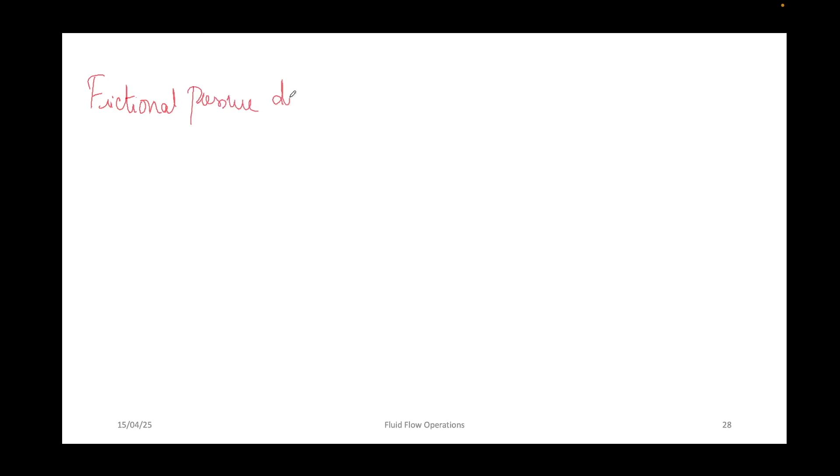And then we have frictional pressure drop. So pressure is one of our main design variables, right? It governs the flow energy required to transport multiphase flow in certain flow systems. The multiphase flow in a pipe is a more complex phenomenon where movement of phases constitutes several changes in flow behavior to influence the transport processes in the pipe, either the direction of flow is vertical or horizontal.

And the practice is to multiply the single phase pressure losses by a factor known as two phase multiplier, which is empirically correlated. And the pressure head or head loss occurs in all piping systems because of elevation changes, turbulence caused by abrupt changes in directions, and friction within the pipe fittings. So basically, delta PT will be equal to delta PS plus delta P mom plus delta PF. Okay. So here delta PT is the total pressure drop.

And delta PS is the hydrostatic pressure change. So the pressure changes due to difference in heights is known as hydrostatic pressure difference. And the hydrostatic pressure head term is based on the true average density of a mixture in the pipeline, which is evaluated with a precise knowledge of the holdup of liquid and gas in a pipe section.

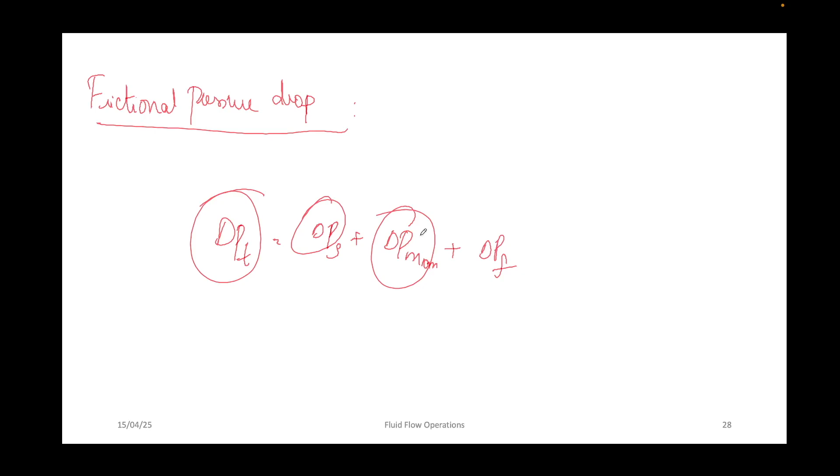So there are different formulas to calculate the frictional pressures. I'm not going into that, which we already discussed in the class. So we'll go to the next topic, which is phase interaction. First, let me write this down.

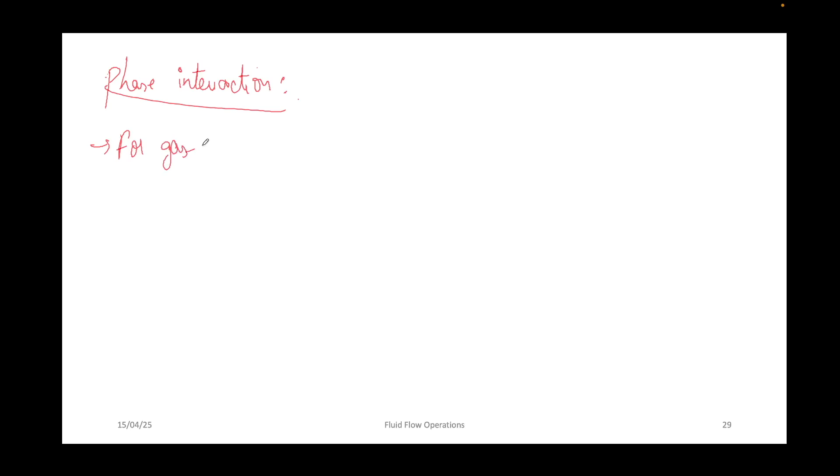For gas liquid two-phase flow, we have bubble coalescence, bubble breakup, bubble size distribution.

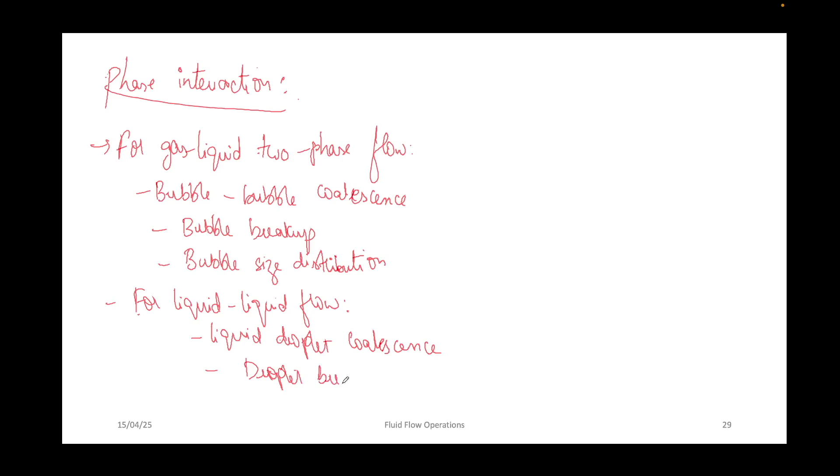And for liquid-liquid flow, droplet breakup, its size distribution. Okay. And for gas liquid three-phase flow, just a second.

For the gas liquid solid three-phase flow, there is bubble-solid and liquid-solid interactions.

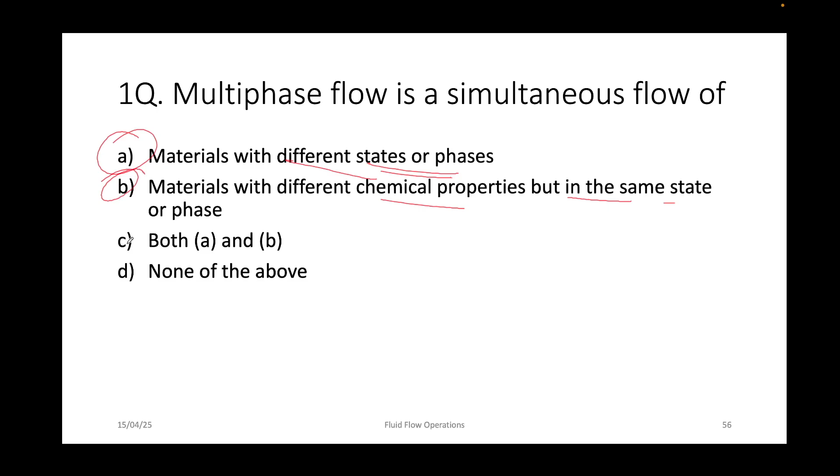So multi-phase flow is a simultaneous flow of materials with different states or phases. Okay, and then we also have one more definition, that is flow of materials with different chemical properties but in the same state or phase. This is also an example definition of multi-phase flow. So that will be option C, both A and B.

Coming to second question, roasting of ores is an example of what type of multi-phase flow? Gas solid flow, gas liquid flow, solid liquid flow, none of the above. So roasting of ores is an example of gas solid flow. That is option A, right?

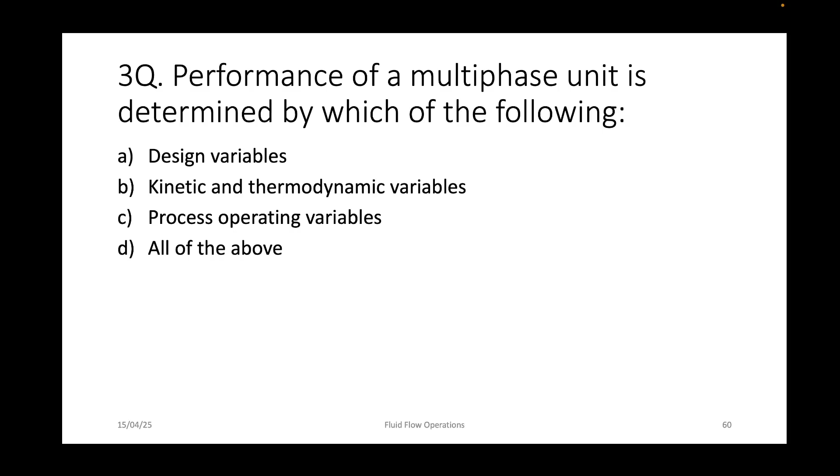Coming to third question, performance of a multi-phase unit is determined by which of the following? Option A, design variables. Option B, kinetic and thermodynamic variables. Option C, process operating variables. Option D, all the above. Which of the parameters or variables will affect the performance of a multi-phase unit? That would be option D, all the above, right?

Coming to fourth question, in a spray column, the liquid is a discrete phase while gas is the continuous phase. This configuration is beneficial for separating gaseous pollutants that are: option A, partially soluble in liquid; option B, highly soluble in liquid; option C, reactive with liquid medium; option D, none of the above. So this will be helpful when they are highly soluble in liquid. That is option B. Okay.

So coming to fifth question, pipeline drilling involves which kind of multi-phase flow? Option A, liquid solid. Option B, solid gas. Option C, gas liquid solid. Option D, gas liquid liquid. Pipeline drilling will involve gas, liquid, and solid flow systems. That is option C.

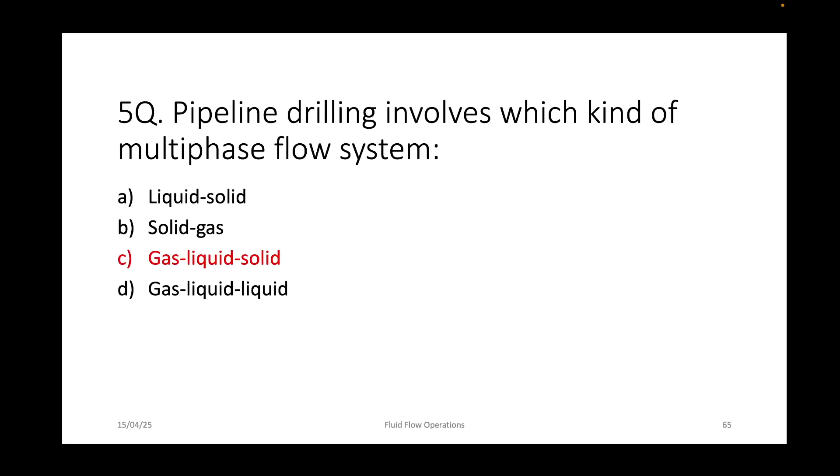Okay. So coming to sixth question, multi-phase flow behavior is affected by option A, interfacial tension forces. Option B, contact angle and wetting characteristics of the liquid on the channel wall. Option C, the exchange of mass, momentum, and energy between the phases. Option D, all the above. The answer will be option D, all the above. Okay.